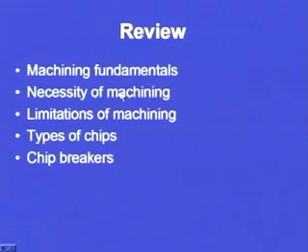So, we have discussed what are the machining fundamentals, why machining is required, how does it compare with the other manufacturing processes like casting, forging or other metalworking operations, where does the application spectrum of machining lie. Then we discussed the necessity of machining, in which we discussed a number of points where machining has been shown to be imperative, necessary, and I can go to the extent of saying that it is inevitable for certain products.

So, there are certain categories of products which, if we are not going to machine them, we are not going to utilize the complete capability or the complete functions of those particular products. So, machining thereby becomes imperative, or I can say it becomes inevitable. Then what were the limitations of machining?

We have seen the first and the most important limitation of machining was that if we are roughing, then a major part of the material, and if we are finishing, then a smaller part of the material is waste. So, wastage of material is one of the most devastating aspects; economically we are not able to justify the machining operation as compared to the conventional manufacturing processes. In conventional manufacturing processes there is no loss of material, but in machining there is always a loss of material in the form of chips.

Then we discussed the different types of chips that are formed. The different types of chips discussed were continuous chips, built up edge chips, then the serrated and segmental chips, and finally the discontinuous chips. We have also seen under what conditions and for what type of materials these types of chips will be formed.

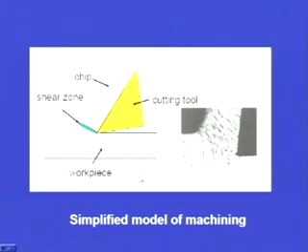Then this tool can be of any material. We will see as a subsequent part of this lecture what are the different types of tool materials and the requirements from them, like it should have hot hardness, or what type of properties it should have. Then the workpiece properties also influence the machining operation. Moreover, the types of chips we have already discussed. So, here we see this black portion is the tool and this is the chip that is getting formed. So, this is a very simplified model of a machining operation.

Now, this is what we are going to continue from the last lecture. We were discussing the chip formation in metals. Chip formation in non-metallic materials also takes place in the similar manner. So, just I will read it out. Chip formation mechanisms for metals, which we have already discussed, are generally applicable to non-metallic materials also. So, the mechanism of chip formation will remain same in case of non-metallic materials.

A variety of chips are obtained in cutting thermoplastics. Thermoplastic is one non-metallic material that has been chosen, depending upon the type of polymer as well as the process parameters such as depth of cut, tool geometry and cutting speed. So, if we are cutting thermoplastics, the basic mechanism of chip formation will be same, but it will depend upon the type of the polymer, that is, the type of the workpiece material that we are machining, as was in the case of metals.

If it is a ductile material, the chip formation will be different. If it is a brittle material, the chip formation will be different. Similarly, in case of thermoplastics, it will depend upon the type of the polymer chosen for machining. So, workpiece material will define what type of chips are going to form, as well as the process parameters, that is depth of cut, cutting speed, or feed rate. These will dictate what type of chip formation will take place.

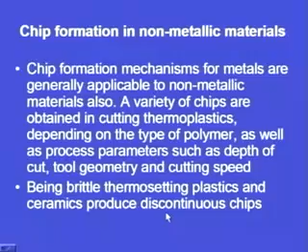So, being brittle, thermosetting plastics and ceramics produce discontinuous chips. So, here also the thermosetting plastics are brittle in nature, whereas the thermoplastics will undergo some kind of deformation and some continuous form of chips may be formed.

Now, if we take an example of chip formation in non-metallic materials, if we take example of fiber reinforced plastics, these plastics can be thermosetting or thermoplastic. When these plastics have been reinforced with fibers, the fibers may be of carbon, graphite, aramid fibers or glass fibers, depending upon the type of the fiber that has been chosen, as well as the matrix that has been chosen to form a composite material.

The chip formation will depend upon the number of parameters that we have already discussed. So, first important parameter is the material out of which it has been formed. If we consider that it is a thermoplastic, meaning the matrix is made up of a thermoplastic and the fibers are, suppose, glass fibers, when we machine it, the type of chip formation will be entirely different than if the matrix material is thermosetting plastic.

So, it depends upon the basic ingredients of the raw material or of the component that we are machining, what type of chip formation will take place, but the basic mechanisms of chip formation will remain same. It will not vary too much between the metals and the non-metallic materials.

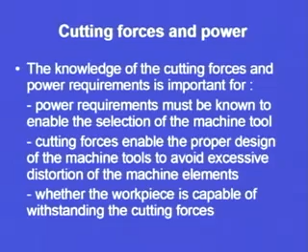Similarly, the cutting forces enable the proper design of the machine tools to avoid excessive distortion of the machine elements. So, we have been discussing the same point from the last slide also, that the cutting forces enable the proper design of the machine tool. If we are not knowing the cutting forces, then the machine tool may not work properly, or the design may not be according to the requirements of that particular machining operation.

So, excessive distortion to the machine elements should be avoided. What are the different problems of excessive distortion that we have already discussed in the previous point? So, excessive distortion, vibration, chatter, all these things have to be avoided, and how will it be avoided? If we have prior knowledge of the forces that will be encountered during this machining operation, and the power requirements for this machining operation.

If we know what the forces and the power requirement are going to be, we can very easily control different types of problems that may later result if this consideration is not given at the onset, or at the beginning. If we do not give this consideration regarding the cutting forces and the power requirement, then all these problems of distortion of the machine element, vibration, chatter, deterioration of the surface finish, excessive tool wear or breakage of the tool may take place after some time.

Now, whether the workpiece is capable of withstanding the cutting forces is also an important point. The workpiece material will define whether it will be able to sustain that kind of cutting forces or not. If we take a material which is not able to withstand the cutting forces generated by that operation, then the material will fail and we will not be able to use it for its intended function. So, knowledge regarding the cutting forces as well as the power is important for the smooth and proper operation of the machine.

But we can also experimentally measure the forces that are going to be generated while machining a particular material. So, two important measuring devices have been given in this point: the resistance wire strain gauges or the piezoelectric crystals. These can be used to measure the forces.

So, how is this incorporated? Suppose we take an example of a drilling operation. The drill is given a motion, suppose this is the z direction. So, the drill is given a motion in the z direction and the workpiece is in the xy plane.

Now, when the drill is coming and it is going to make a hole inside the workpiece, that is in this plane, then below this workpiece we can mount a dynamometer. So, this dynamometer can work on any of the principles as shown on your screen. There are two principles that have been shown. The first one is the resistance wire strain gauges and the second one is the piezoelectric crystals.

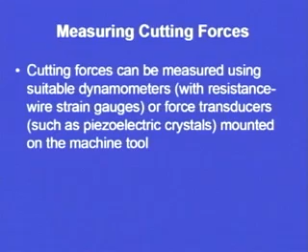So, any of these two can be used and we will mount the dynamometer that we have selected below this workpiece. So, when the drilling operation is taking place, this 4 component drill dynamometer can be connected to the charge amplifier and to the display. Now, this display can be a digital display or the display can go directly into a computer system where we can see how the forces are varying with the time and what is going to be the magnitude of the forces. Now, magnitude of the forces that are being generated can be seen on the y axis with the time on the x axis.

So, we will be able to see how the forces are varying, whereas if we have a digital display, we can have a maximum value of the forces that have been generated in this drilling operation. So, it depends for what purpose we are recording the forces. If we are only recording the forces to know what is going to be the maximum force for drilling a hole in this particular material, we can have a digital display on which we will know that this is going to be the maximum force, or we can say this is going to be the maximum torque. There will be different types of forces that will be generated during the drilling operation.

But if we want to go in for further analysis of how the force is varying when the drill point touches the workpiece, what is the force when it is doing the drilling operation, when the lips are completely in engagement with the workpiece, what are the forces generated when the drill has come out of the hole or has started to come out of the hole. So, that particular behavior of the force with the time during the drilling operation can be seen on an xy plot to try to understand how the force is varying with time when a drill is making a hole inside a workpiece. So, using any of these instruments we are able to measure the forces.

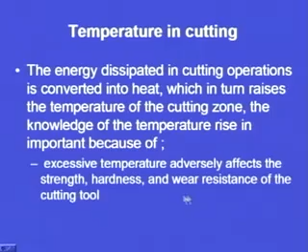Excessive temperature adversely affects the strength. So, first important point is the strength will be affected by the increase in the temperature. The hardness will also be affected. Moreover, the wear resistance will also be affected. So, 3 important parameters of the cutting tool are getting affected by the increase in the temperature in the cutting zone: strength, hardness and wear resistance.

Now, the cutting tool is an important element of the machining system. If our cutting tool is not performing its function properly, then whatever is the intended function, whatever is the surface finish requirement or whatever is our desired quality, that will not be attainable. So, it is important that the temperature in the cutting zone has to be controlled. For example, here we take only one important aspect, that is hardness.

Now, machining we have already discussed, it is an operation where we employ the aspect of relative hardness. There is a workpiece, there is a tool, the tool comes and performs its operation on the workpiece. The tool has to be harder than the workpiece, but because of this operation the heat is getting generated and the tool is losing its hardness.

If the tool loses its hardness, it is not going to perform the intended operation or the machining operation for which it has been used, and if it is not going to perform the operation, then there are chances that the surface finish that we will get will not be good, or sometimes it may so happen that no machining itself is taking place. So, the temperature control is also very important.

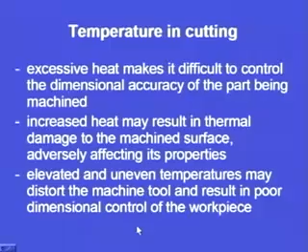We discussed in our last lecture that there are three important elements of machining. What are those three important elements? The workpiece material, the tool material as well as the machine. So, when the heat is getting generated in the cutting zone, the tool is affected, the workpiece is affected, and the machine tool is also affected. When the machine tool is affected, it results in poor dimensional control of the workpiece, because of the distortion in the machine due to the temperature.

This may be a rarest of rare phenomenon, because the cutting zone is at a large distance from the machine tool, whether the machine tool bed, head or tail stock. The temperature rise will take place only in the cutting zone. But sometimes because of uneven heating or high elevated temperatures, this problem may arise. Under certain special circumstances, there is a distortion in the machine tool, which is subsequently going to affect the dimensional control of the workpiece.

If the machine elements are distorted, the surface finish or the dimensional control of the workpiece that we are machining will not be according to our desired levels or the proper quality specifications for which we are going to perform the machining operation.

Now, we have seen that forces are generated, power is required, and we can measure the power and the cutting forces. We have already seen that dynamometers are used to measure the cutting forces. Similarly, the measurement of temperature is also important. Why? When we know the temperature that is going to be generated, only then can we exercise some control and see how this temperature has to be lowered or avoided. If we do not know it, it is too difficult to exercise control. So, the measurement of temperature is equally important.

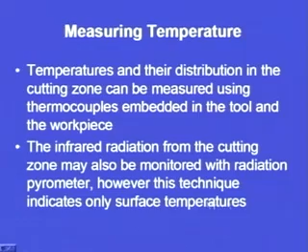When we are embedding a thermocouple into a tool and a workpiece, we are going to get the temperature at that particular location. Whereas, if we are going to use a radiation pyrometer, we are only going to get the temperatures at the surface of the workpiece being machined. So, the limitation is that if we want to know the temperature in the bulk of the material that is getting machined, that is not possible using this technique.

Moreover, the emissivity of the surface, how emissive the surface is, will affect how sensitive our instrument is. If the emissivity is good, the pyrometer may give us the exact reading of the temperature, but if the emission is less, it may so happen that we are not able to exactly record the temperature of the surface. If we are using a thermocouple, it is relatively difficult.

If we are using a pyrometer, it is relatively easy, but depending upon the application areas, each of these instruments has its advantages as well as its limitations. So, depending upon the requirement and the type of machining operation that we are performing, we can select any one of these techniques. There will be other techniques also, but because of the time constraints we are not going to go into detail of all the techniques for measuring temperature.

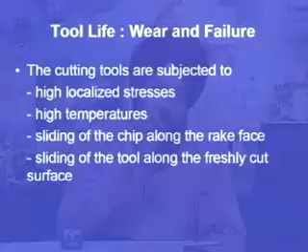The second is high temperatures. We have already seen that while machining, high temperatures are generated in the cutting zone, or heat is generated in the cutting zone. Because of that heat, there are elevated temperatures, and at elevated temperature the hardness, the strength, as well as the wear resistance of the tool is going to be affected. So, it is subjected to highly localized stresses; cutting tools are subjected to high pressures.

Then the sliding of the chip along the rake face. In the very first diagram that we have seen today in our lecture, there is a cutting tool and the chip goes at the face of the tool like this. So, this basically is the rake face of the tool. Suppose this is a tool, this is the rake face of the tool, and the chip goes over the rake face of the tool like this.

So, in this rubbing action, the chip is a work hardened material sometimes. When this hard material is rubbing against the tool rake face, there is always going to be some effect on both of these, but the chip is not going to be used for any other purpose. It is a waste material only, but the tool rake face has to be used again and again. This tool has to be used again and again.

So, when the chip is causing an abrading action or wear on this particular rake face, then there is going to be certain failure of the tool after some time. It is not that once the chip has rubbed, the tool is going to break, but gradually when the chip is continuously rubbing against the tool after some hours of service, maybe I say that the tool after 10 hours of service, there may be some kind of wear that will be noted on the face of the tool. So, that has to be avoided.

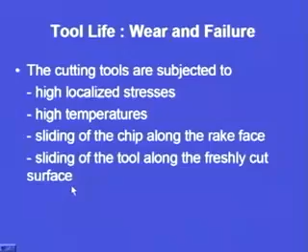Now, when the tool is doing the machining operation like this, the tool also has two faces. Suppose this is the tool that is going like this. So, this face and the machined face, suppose this is the machined face, when this is moving, if we are not providing a proper relief angle or we are not providing the proper tool geometry, one face of the tool may rub against the machined surface, and subsequently we will note some kind of wear on the surface of the tool that is rubbing against the freshly generated machined surface.

So, it is important for us to understand all these phenomena which a cutting tool undergoes in order to ascertain the tool life. The tool is subjected to highly localized stresses, it is subjected to high temperatures, it is subjected to rubbing action of the chip along the rake face of the tool, or one face of the tool is rubbing against the freshly generated machined surface.

So, what are all these things going to result in? All these things are going to result in tool wear, and that will later on result in tool failure. So, the tool life will depend on all these parameters that we have just discussed. Now, these conditions induce tool wear, which in turn adversely affects the tool life. So, I have already addressed this point in the previous slide.

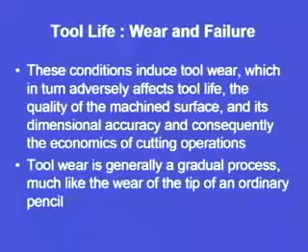Tool wear is generally a gradual process; it is going to take place, but it should be in a controlled manner, much like the wear of the tip of an ordinary pencil. When we keep on writing, some wear is going to take place. Similarly, when we are using a cutting tool, some wear is bound to happen, but it should not go beyond a particular level, otherwise the tool life will end there and the tool has to be either reground, discarded or replaced.

So, with this we come to the end of this session on machining. We have discussed today some of the basic fundamentals of the machining operation: how tool wear takes place, the different types of forces, how we can measure the forces, and the importance of controlling the temperature in the machining operation. Subsequently we will discuss the different types of machining operations, and we will carry this discussion forward into the next lecture.